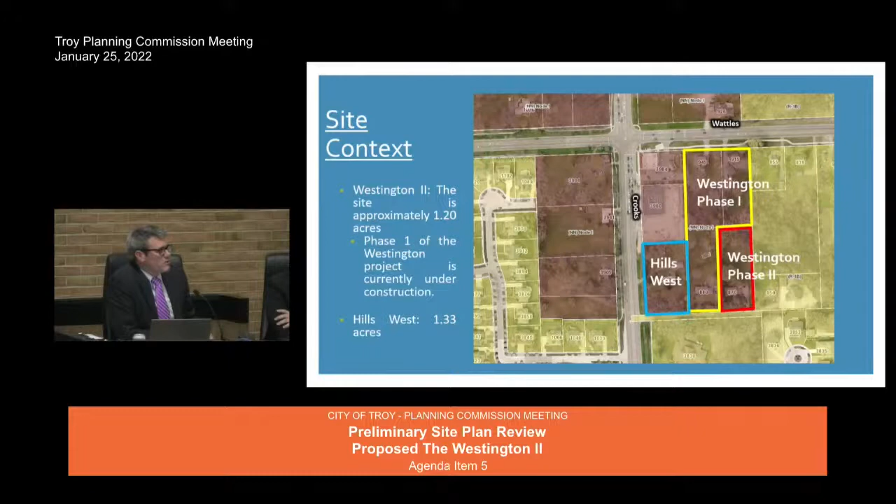This is the site context of the two developments. You'll notice it's flipped a little bit, so north is actually pointing this way. Phase 1 of Westington includes this project outlined in yellow. It includes 4 buildings. Phase 2 of Westington is kind of in the back end of Phase 1. It includes these 2 buildings and has shared parking and shared circulation.

The second project is Hills West, which is directly adjacent to Crooks. It also includes 2 buildings. These 2 projects, each of them are 30 units, so a total of 60 additional units located in 4 separate buildings of 15 units each.

Access with regards to the project includes an access off of Wattles, an access off of Crooks, an access through the 7-Eleven site, as well as a cross-access between the Hills West project and Westington Phase 2. It's my understanding, as well as in discussions with the applicant and a requirement based on some of the other zoning matters I'll raise, that Westington Phase 2 is combined with Westington Phase 1 to essentially be one project from a zoning perspective.

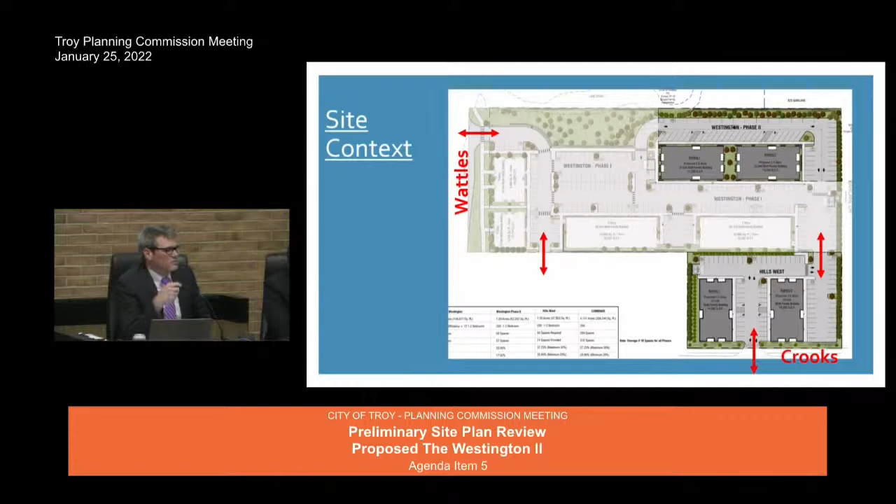With regards to Westington Phase 2, that site in the corner adjacent to Westington Phase 1, we note there is an existing 100-year floodplain in the corner of the site. It's a similar issue that was contemplated as part of Westington Phase 1. The applicant proposes to continue an improved retaining wall that runs from Phase 1 into Phase 2 to deal with that issue. Floodplain confirmation would be determined as part of final engineering, which we do for all projects in the city.

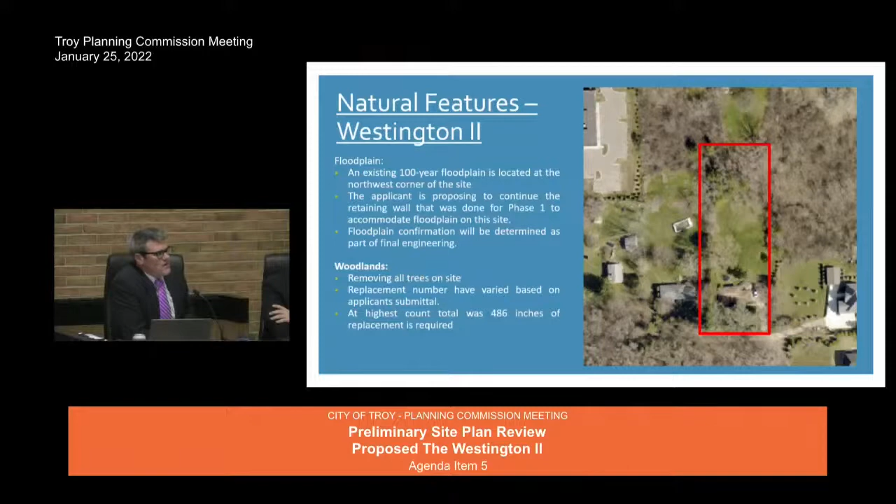With regards to Woodlands, it appears they're removing all the trees on the site. The replacement numbers have varied based on the applicant's submittal. I reviewed three different site plans for this over the last couple of months, and the numbers have slightly varied. At the highest count, I calculated a total of 486 inches of replacement required.

Furthermore, in discussion of the tree preservation issue, there's a number of clumping of trees, particularly located where I've outlined in red, that are significant woodland trees of some significance. We're asking the applicant to consider if they can shift buildings around, reduce the size, etc., to preserve more of those trees. In consultation with that recommendation, we're also asking that they confirm the location and number of tree replacement to ensure they comply with the ordinance.

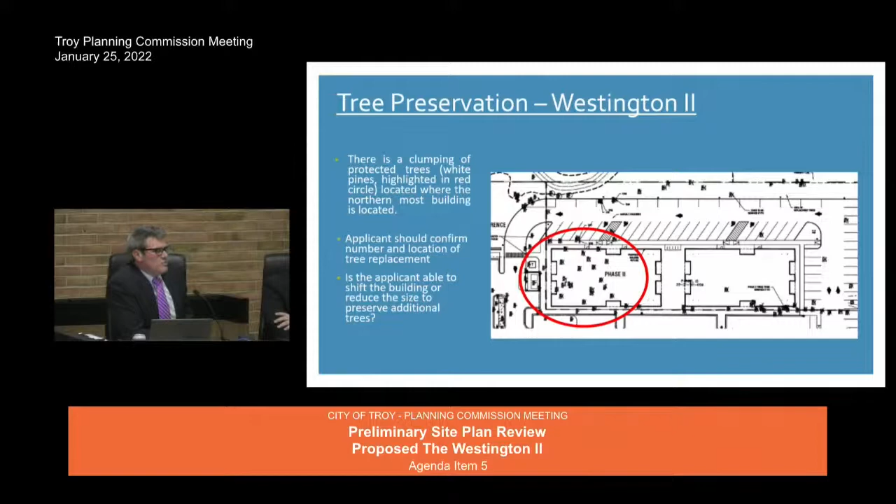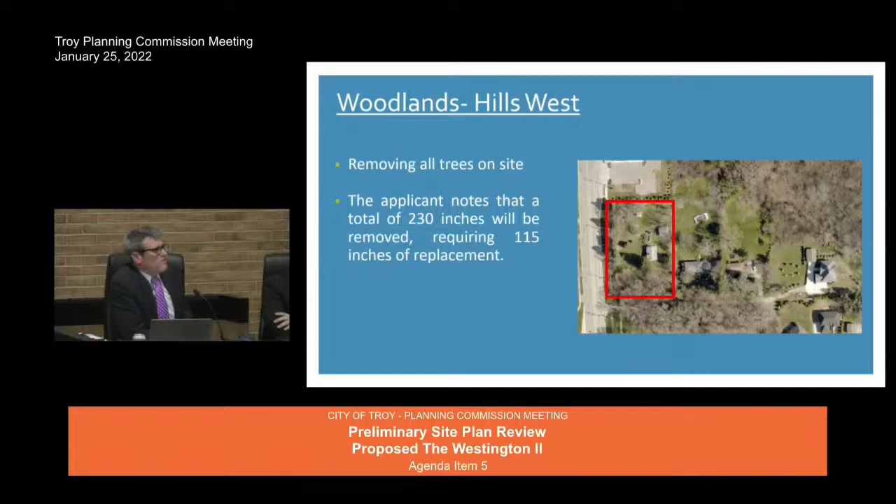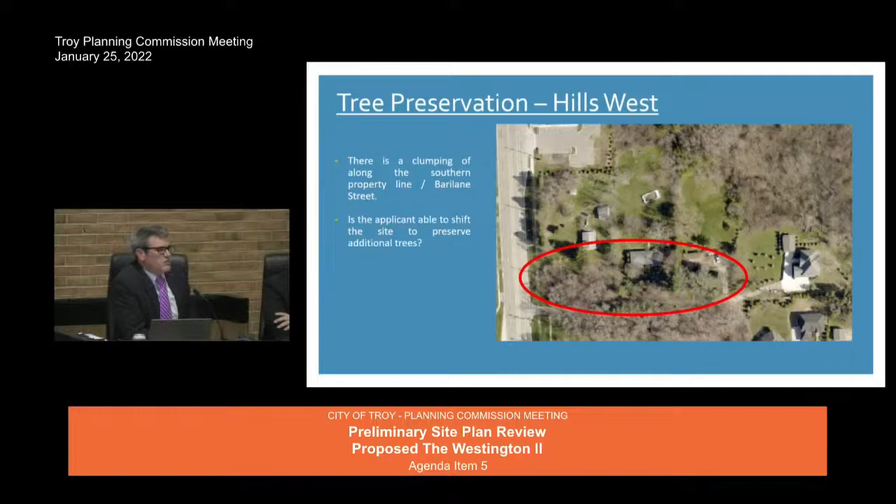Looking at the issues with regards to Woodlands at Hills West, this is not in the floodplain, doesn't have any wetlands, but it does have some trees on site. Again, they're removing all trees on the site, and the applicant notes they're removing 230 inches, requiring 115 inches of replacement. We note there is an opportunity to save additional trees along Barilane Street, located in the southern end of the site. We're asking the applicant if they're able to shift the property around or reduce part of the building to preserve additional trees.

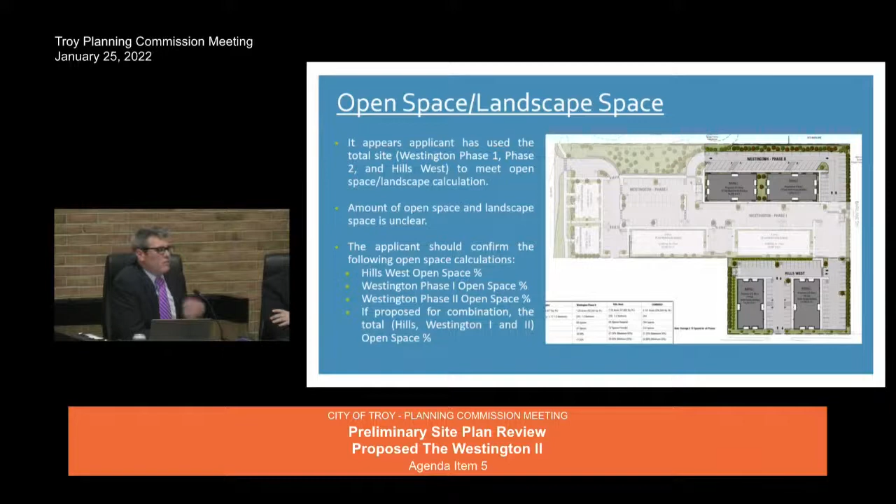With regards to open space, it appears from the application they're planning on using the open space in totality by combining all phases, Phase 1, Phase 2, and Hills West, to meet those open space requirements. The amount of open space is unclear from the application, as well as landscape space. So we're asking the applicant to confirm the amount of open space provided for each individual phase, as well as the total in combination. Their indication, based on the total, is approximately 20.99% of open space and landscaping, which in totality would meet that requirement. But we're asking them to provide the calculations for each of those different components.

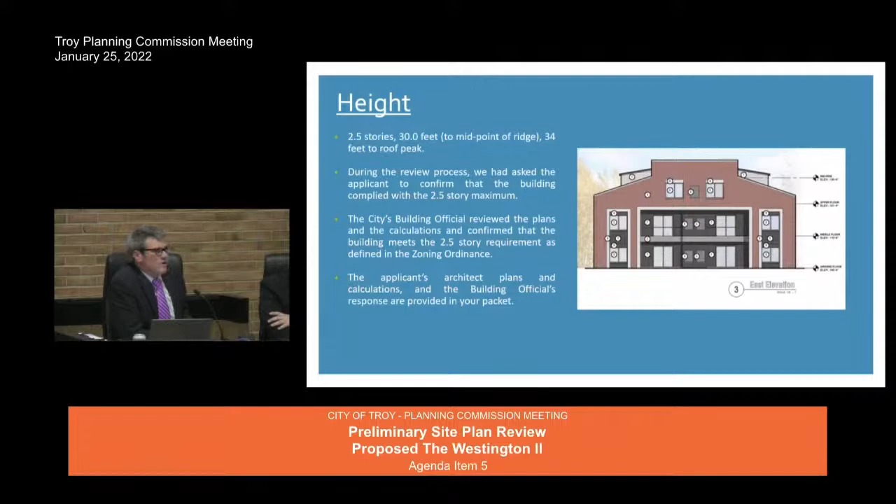One of the questions that came up during our review was the issue of height. The Planning Commission has passed an ordinance requirement noting that developments adjacent to single-family residential have a maximum height of 30 feet or 2.5 stories. As part of our review, we asked the applicant to confirm they met the story requirement of 2.5. The city's building official looked at the submitted plans as well as additional calculations, and confirmed they do meet that 2.5 story requirement, in the plans from the architect as well as the building official's responses in your packet for additional information.

Similar to open space and landscaping, there are combinations of the site used to meet ordinance requirements. Westington Phase 2 requires 60 spaces. Based on what was shown, they're deficient in parking for just Phase 2. However, when combined with Phase 1, they do meet the required spaces, and they're including 4 additional guest spaces with Phase 1 and Phase 2. If you look at the Hills West project, they required 60 spaces and are providing 74. So in total, combining the two sites, they're providing approximately 16 or 18 guest parking spaces. What's not been clear to us is if there's going to be a shared parking agreement between Hills West and Phase 1 and Phase 2, and how that may work.

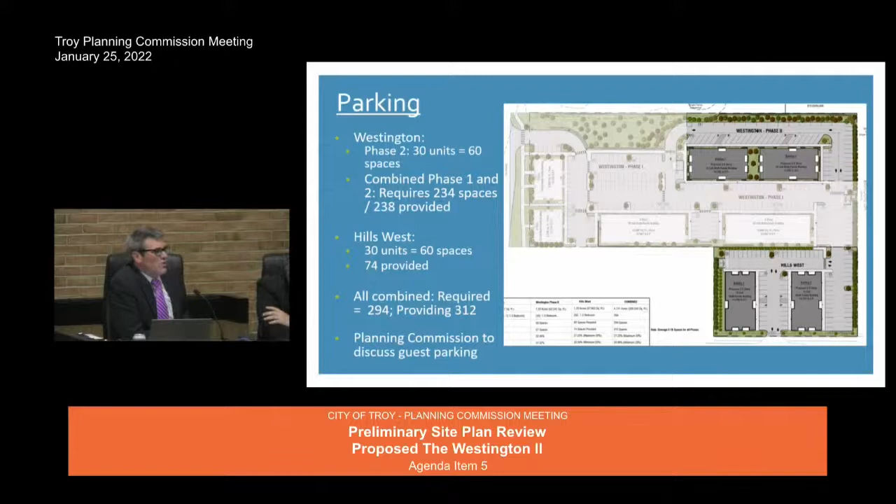We also asked that the Planning Commission discuss whether or not guest parking is sufficient, or if additional parking needed to be provided. We asked the applicant to provide a traffic study, understanding that traffic would be a significant issue of discussion with the Planning Commission. As part of the traffic study, in consultation with the engineering department, the applicant did a traffic study of all 3 of these developments: Phase 1, Phase 2, and Hills West.

In totality, the applicant's traffic study determined that an average daily traffic count would be a little over 1,000 cars a day. Broken down to peak hours, that's approximately 73 total trips in the morning and 90 trips in the evening, or about 1 car per minute in the peak morning and a car and a half a minute in the afternoon peak.

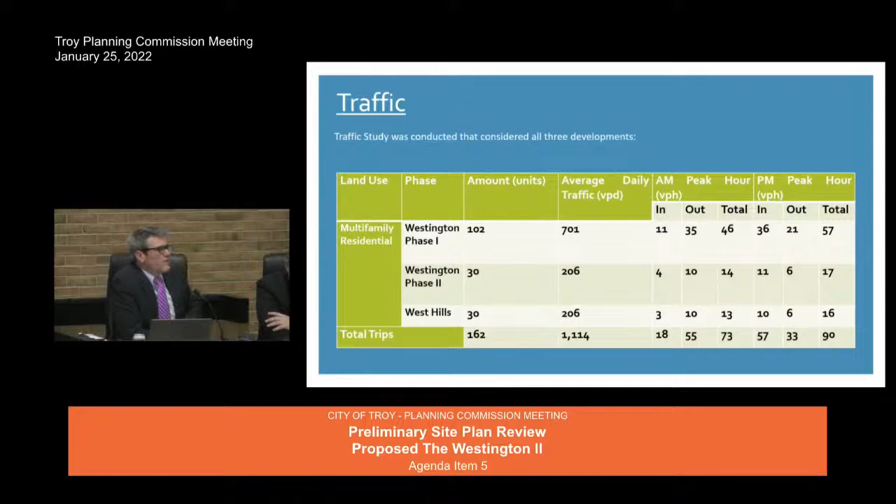The applicant's traffic study concludes that with the addition of site-generated traffic, the study intersection approaches and delays will continue to operate in a manner similar to existing conditions, with only minor additional delays. Therefore, no mitigation measures are recommended to accommodate the traffic volume.

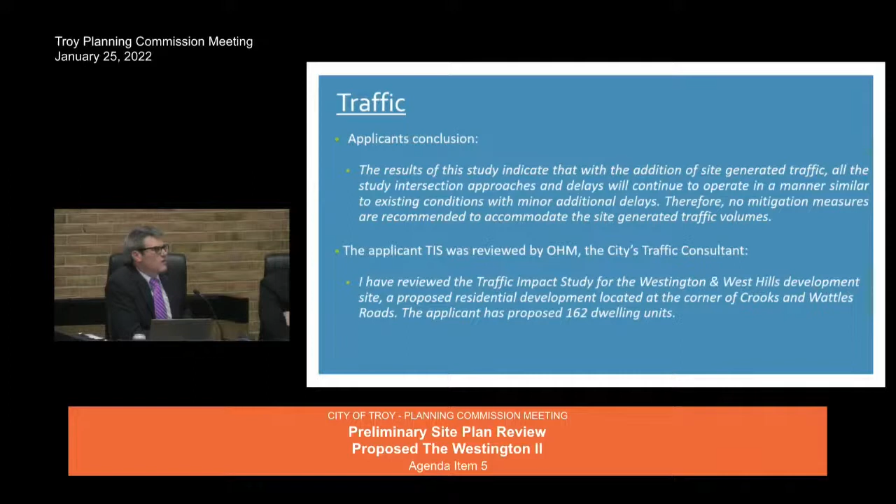The review was done by the city's traffic consultant, OHM, who reviewed the traffic study for the proposed residential development located at the corner of Crooks and Wattles Road. The applicant has proposed 162 units, and OHM agrees with the findings of the applicant's traffic study. Both the applicant's engineer and the city's traffic consultant are here to answer any questions regarding traffic.

This is the elevation. This is one of the side elevations, and it will be more visible in one project than the other. This is the side elevation that fronts on Crooks and would be visible. The elevations for all the projects are the same, they're the same for all 4 buildings.

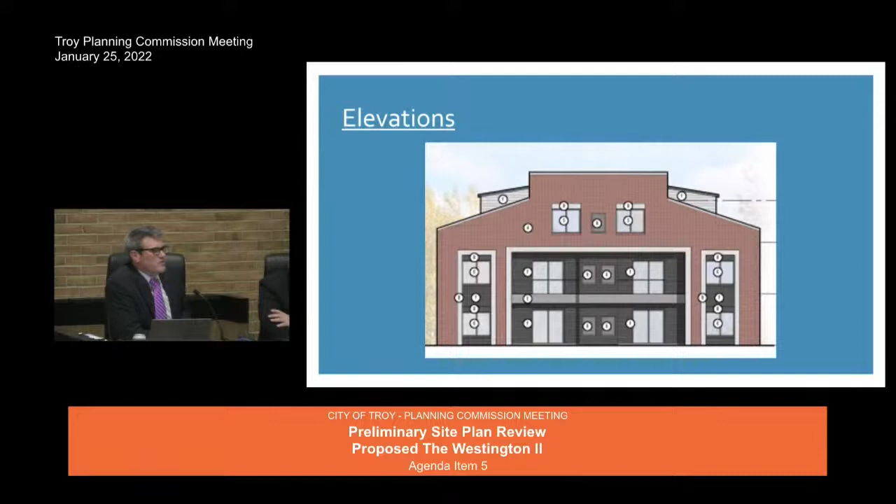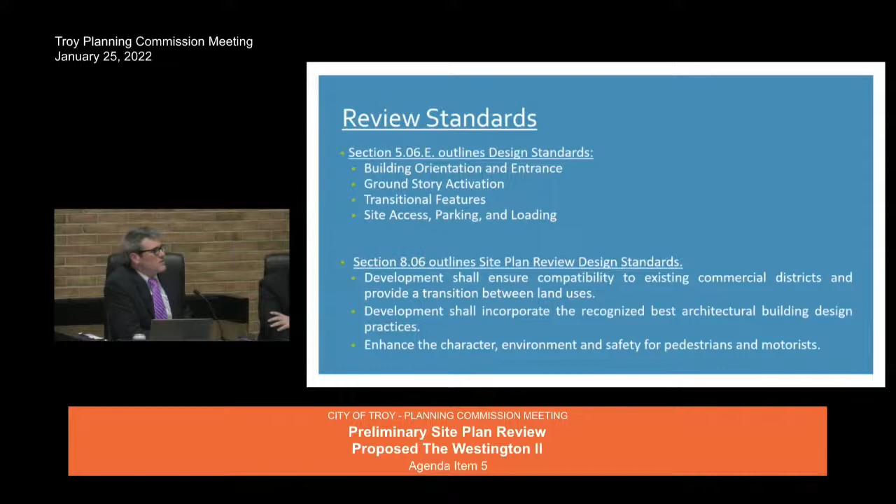There are a number of review standards that the Planning Commission is asked to consider, set forth in the design standards in Section 5 and the site plan review sections in Section 8. Specifically, does the development ensure compatibility with existing commercial districts and provide a transition between land uses? Does the development incorporate best architectural practices in building design? And does the project enhance the character, environment, and safety for pedestrians and motorists?

Mr. Chairman, we ask that the Planning Commission hold discussion with regards to the application. First, can the applicant shift the building or reduce the size to preserve additional trees? Confirm tree mitigation requirements, confirm open space landscaping calculations, discuss the need for additional guest parking, and have a discussion regarding compliance with design standards and site plan review standards.

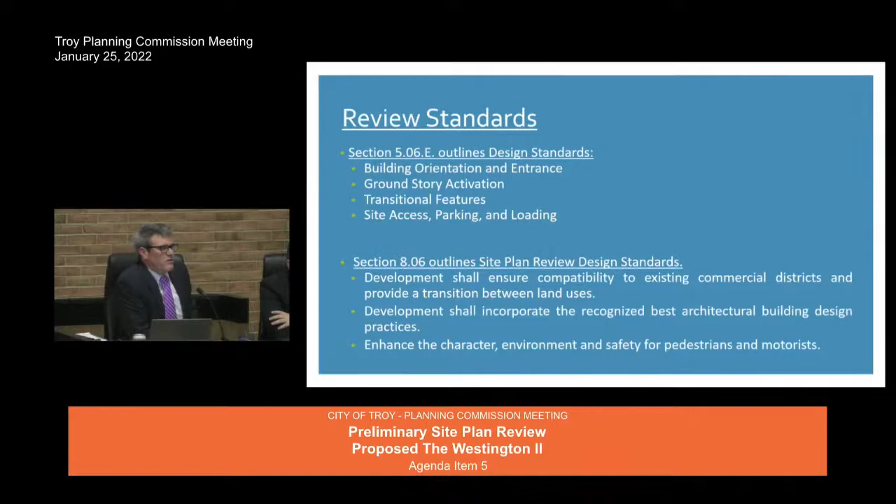Okay, so nothing different than any other site plan review? Nope, these are the same 3 standards we look at for any site plan. I ask because I typically didn't see that called out specifically. Thank you. Any other questions?

Ms. Perakis: Yes, I was not at the December 8th meeting that approved Phase 1, but I was at the October 27th, 2020 meeting where Phase 1 was first introduced. At that time, we discussed all sorts of things, including moving the access into the parking lot to the east to get it away from the Crooks-Wattles intersection and away from the 7-Eleven entrance, because there was much concern by the planning commissioners and residents that the traffic was too heavy there. I also note there was discussion about the massing of the buildings and the requirement of an EVA.

I did pull the meeting minutes from December 8th where it was approved, and they took care of it. They changed the massing and moved the entrance to the east, but it was left where they still had not satisfied the EVA requirement. So it was conditioned upon addressing the fire department's requirements with regards to the proposed EVA prior to final site plan approval.

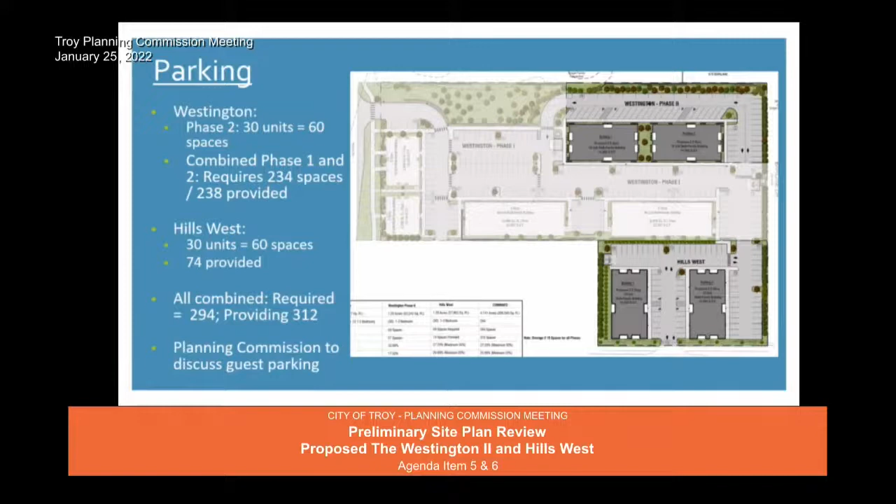Ben, if you could put up the side elevation, the long elevation. Right there, yep. You can see the entrances there. The balcony indent is in the center, and to the left and right of the balcony entrance are the common stair entrances that lead to the upper level units.

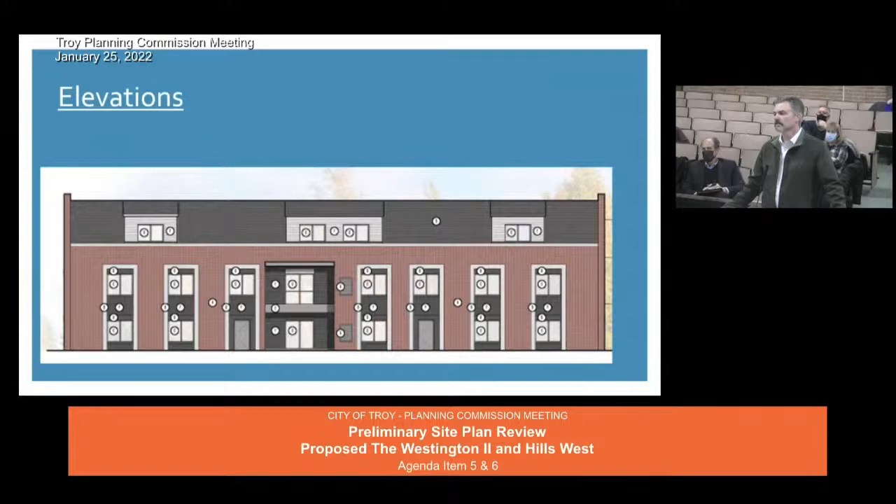Not the best drawing as far as easy to understand, but it looks like there are two doors colored in gray, the third from the left and the third from the right. Those are entrance doors? That's right, so they go to the woods. I didn't see a sidewalk there.

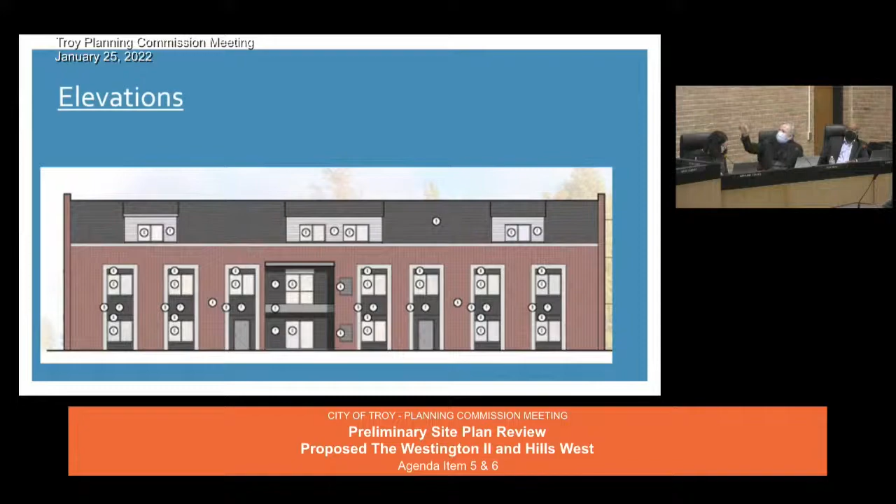On the north side, are we on Hills West or Westington? Hills West. So on the north side, of that building, the elevation that was shown - north is which side, this side? North is to the left, yes. So are there doors on that side? No, not on that side, they're only on one side. Okay, so what did I see in that elevation?

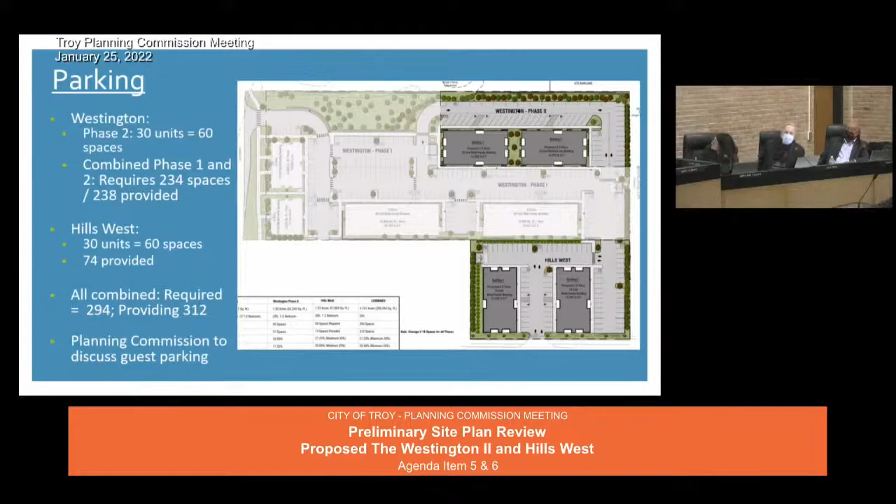The parking lot side, where you park, you get out of your car, you walk through the door. What's the elevation on the north side look like? The same. Can you go back to that? Do you have floor plans up, Ben? I have them in the presentation, in the packet, there's illustrations and floor plans as well. I just wanted to see the elevation on that side of the building, that's all.

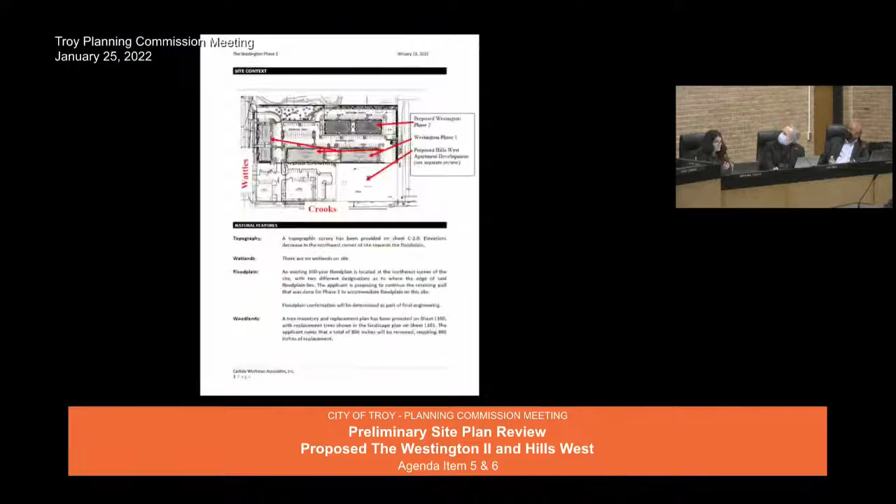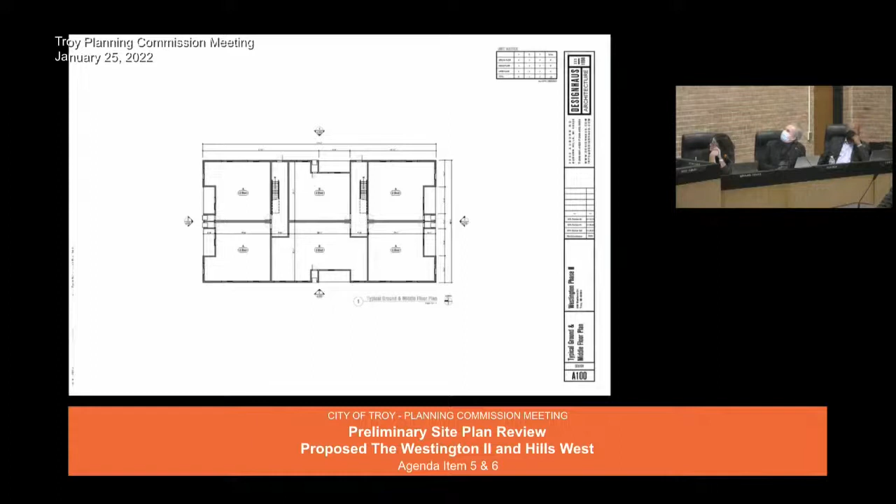Okay, on the other side I still don't see the elevation on the north side, where is that one? On the other side, it's simply, instead of a door, it's a window. Okay, all right, for every building that's the ground floor of every building. Okay, and the doors face the logical entry point by the cars.

Okay, is that a door going into a closet or something? In the middle room on the upper end, yeah. That door goes into what, a mechanical room? Mechanical, yeah, okay.

So right, there's no doors going out that side of the building? On that drawing, the two doors leave the staircase on top, and the sliding doors enter all the balconies that are recessed. Okay, so that goes to a parking lot, then the other elevation that I don't see - right, that goes to the woods. Yeah, that is the side on the woods. That's correct. All right, good, okay, thanks.

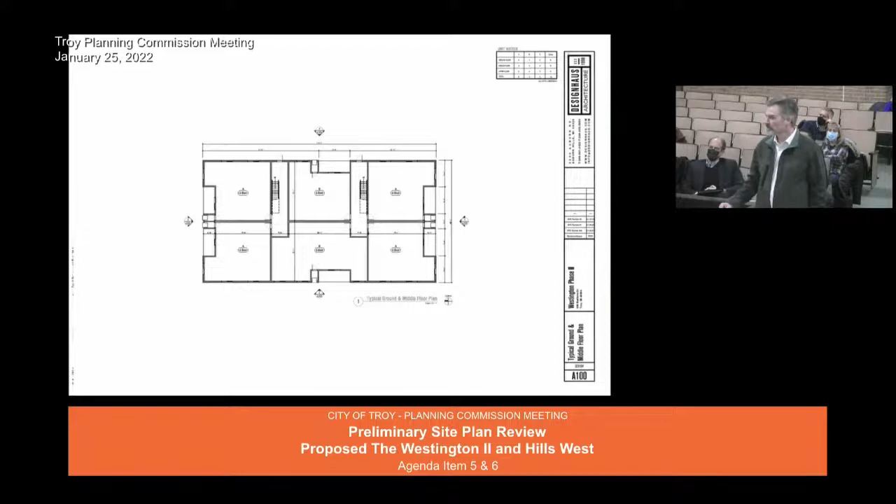And Mr. Hudson, Mr. Strubler, I've got a couple of questions on open space. Yes sir. I heard our planning director indicate that you are going to meet the minimum requirements for open space by combining these projects into one. Is that correct? That is half correct - combining only one and two. One and two combined create 20.99%. Hills West stands on its own with 20.47%. Okay, and what is that open space going to consist of?

Trees, landscape, grass. Okay, then a question for the city attorney, if I may. Can you have two site plans combined for one purpose to achieve an open space requirement under the ordinance for each plan? Mr. Hudson, I'm going to defer to Mr. Savidant on that. I believe there's precedent for that, though I can't think of a project.

The sites would have to be required prior to final site plan approval, to be combined - they'd have to be combined as a condition. So prior to site plan approval, the sites would have to be combined. Well, is there a requirement that each site must have a minimum on its own for open space? Is there a provision in the ordinance for combining plots to make open space requirements met? Not specifically, no.

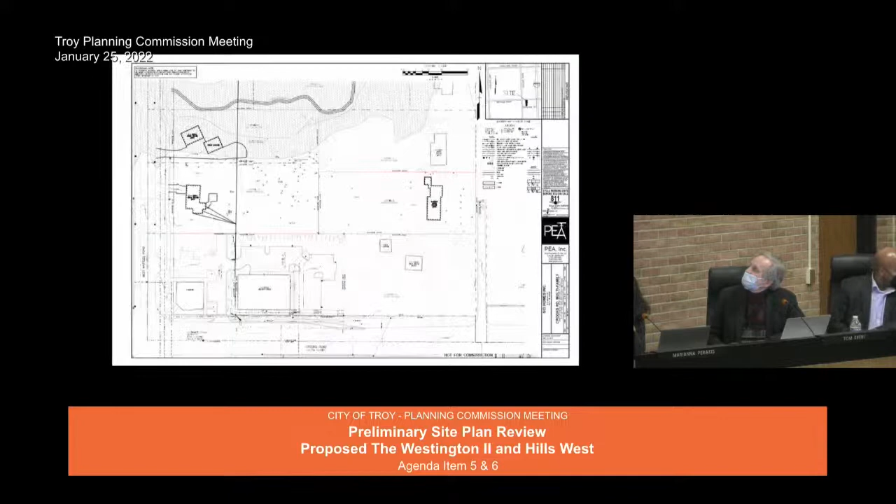Okay, thanks, that one? That's it, yeah, that's good, good enough. So looking at that, and looking at their summation, this was page 6 of Carlisle Wortman's report, and under the column of minimum open space, it says you need 20%, provided unknown, compliance need to confirm. Now I'm looking at that for open space. So my question to staff is, what's open space? Is it the street? Is it the parking spaces? Is it just the green, the thin bands of greenery? It's certainly not the buildings.

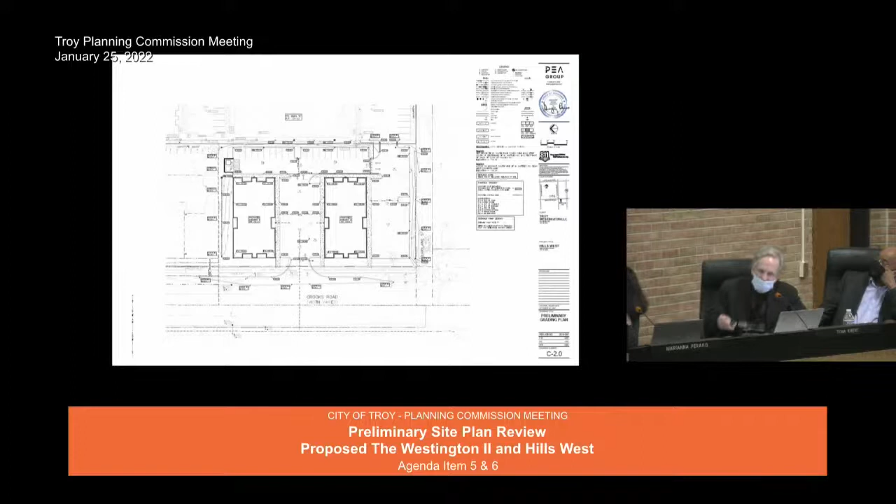I can't see 20% of that image being open space that is not pavement or building. It just doesn't, a quarter of that should be, or 20%, but not quite a quarter, should be open space. I don't see, and again, they don't provide numbers. It says unknown. So how do we vote on something if it's unknown? Just looking at it, I don't see 20% of space that's open for greenery. Of course, this is not a good picture because it doesn't show greenery at all, but I'm a bit confused how it can comply. Well, it says in the report it doesn't, we don't know, it's unknown, so it can't comply, but I can't vote on something without having knowns in writing. I mean, people talking is one thing, but I want to see a document that shows how they calculated that open space, because I don't see it. I don't see 20% of that Hills West being open space other than parking and streets.

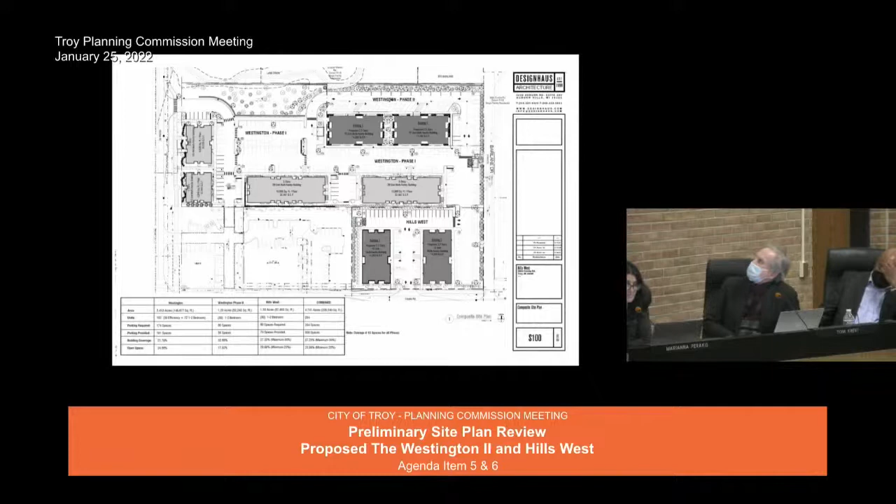That's my comment. Does Mr. Savidant or Mr. Carlisle have a response to that, or?

Well, so when we talk about open space, the first thing we do when we have a zoning ordinance provision is we look at the definition. So I'm just going to read the definition of open space. A parcel or area of land that's intended to provide light and air, that is designed for resource protection, aesthetic, or recreational purposes. Open space uses may include, but are not limited to, lawn, decorative plantings, walkways, active and passive recreation area, land use buffers, playgrounds, fountains, woodlands, wetlands, and bioretention facilities. Open space shall not include streets, driveways, parking lots, or other surfaces designed or intended for vehicular traffic. Great, so my question, you raised the question that I raised, which is confirm that number with regards to the percentage.

I also want to note that there's a landscape requirement too, which is 20%. That does not include areas of walkways, etc. So it's a little bit higher threshold for landscape. I had the same question as well, do they comply with the landscape requirements percentage-wise? Thank you very much.

Any other questions or comments? Mr. Savidant, I'd like to address the conversation or the question that Ms. Perakis had earlier related to EVA and cross-access.

So I left the meeting. I tried to, what I didn't want to do was have people leave the meeting because a question was raised at a public meeting. I didn't want to wait till the next meeting. I wanted to try to do my best to answer the question. So after an application receives preliminary site plan approval from the Planning Commission, which this did, they submit detailed engineering drawings to the engineering department. It's called final approval, and that was ongoing during the summer.